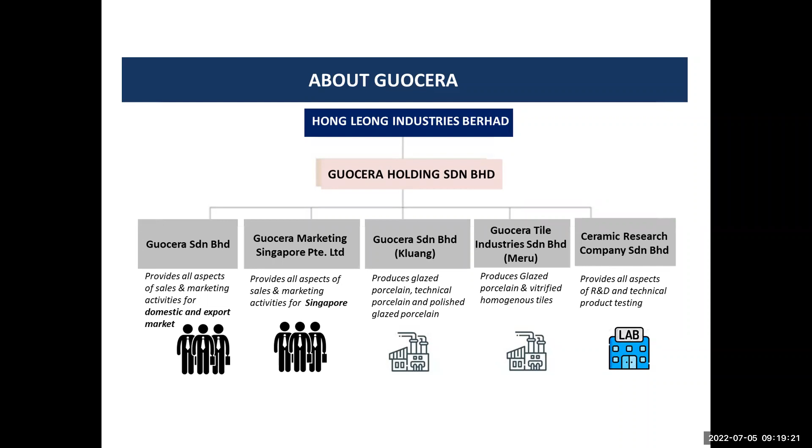We also have a ceramic research company. It's quite unique to our brand, where we do a lot of R&D and technical product testing. Okay, just to share on our two facilities, we have a combined production of 12 million square meters per year, and the factory sizes are 20 acres and 84 acres. All right, we have around 50 years of manufacturing experience in the tile industry, and we also have an export division that the same tiles that we lay here in Malaysia are being exported to overseas, around 60 over countries.

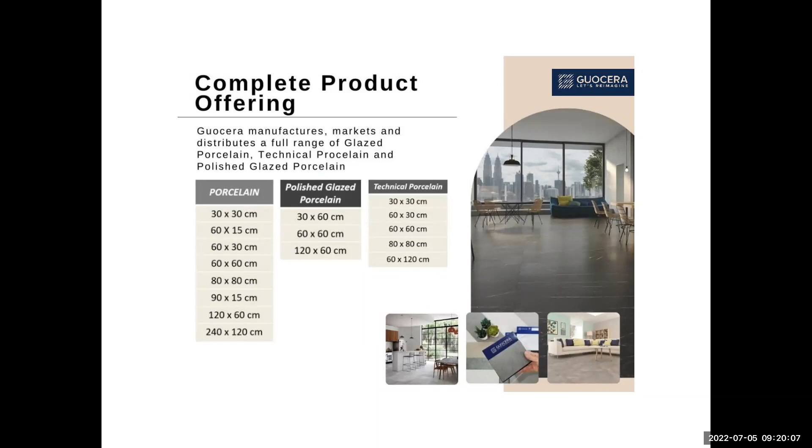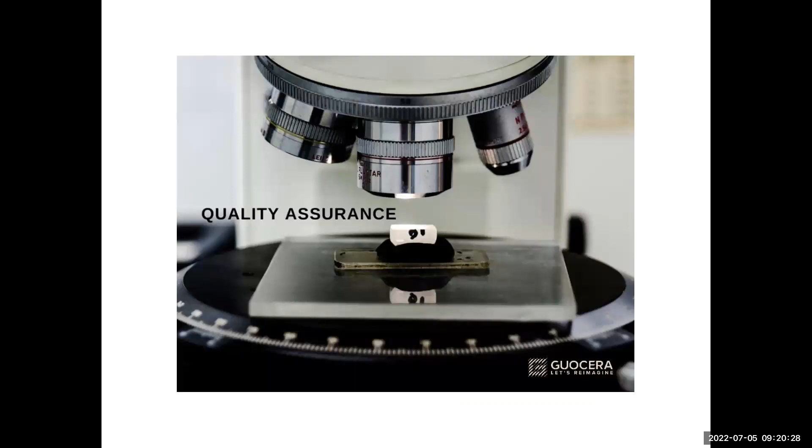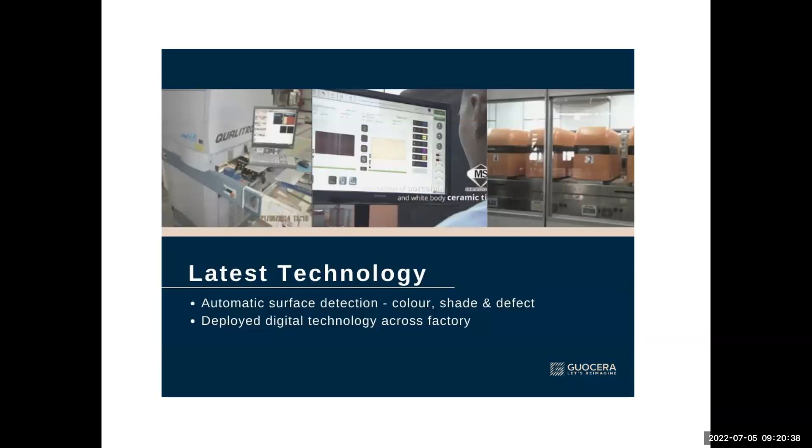Okay, we also have the standard offerings of tile sizes and tile types here, porcelain tile, technical porcelain, and we're also moving towards creating larger formats like 240 and 120 cm sizes and above. All right, we are also working on a lot of NPD product development, working together with European brands, ID brands, to come up with the latest designs in the market. Okay, and of course we have the quality assurance, we have the certifications to comply lah. Okay, and the latest technology that we use in our factories, such as the automatic surface detection, and also other new machinery that we have adapted lah.

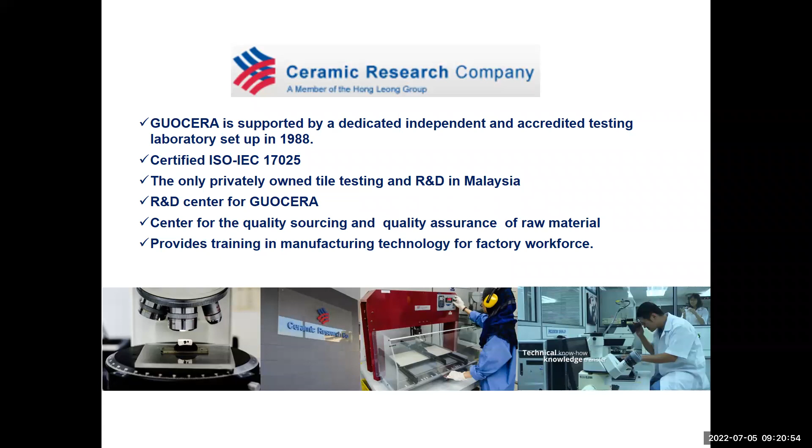Okay, so this is more about the ceramic research company in Meru, Klang. We're also open for visitation. You can get in touch with me, where we do a lot of the sourcing, the quality assurance of the raw materials, and also of our tiles. All right, some of the green, the certs that we comply with, green certs and also others.

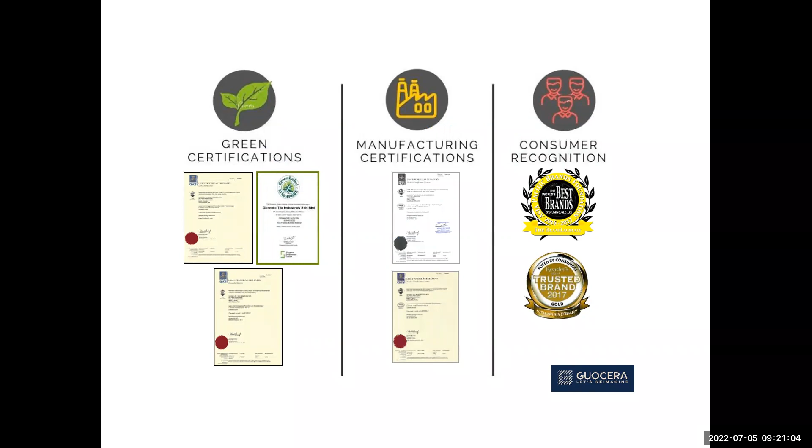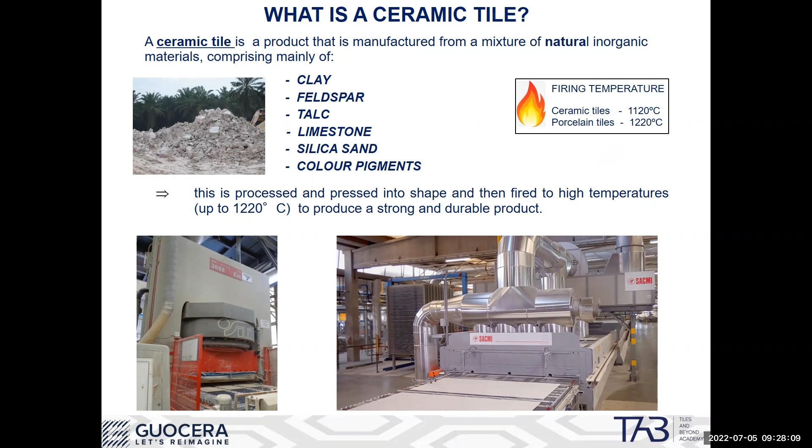You may be asking why this shade variation happens to tiles. There are two reasons. Number one, it is because of the raw materials. As I mentioned, the raw materials used to produce ceramic tiles come from the ground, and these raw materials tend to vary from batch to batch, causing the tiles to have variation from batch to batch as well.

Secondly, it's because of the firing process. You may be asking why the firing process can actually affect the shade variation. It's because the shade or the color is very sensitive to temperature changes. The tiles are fired up to over 1,000 degrees. If there is a drop or a rise in temperature by about 5 to 10 degrees, it will also affect the color. This is the reason why all ceramic tiles will have a slight shade or color variation.

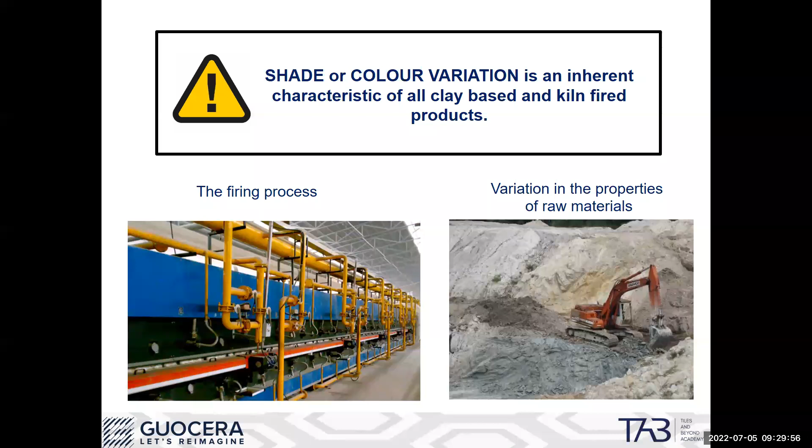Now, what are the advantages of using ceramic tiles? What are the technical features? There is a long list of advantages for ceramic tiles. Number one, traditionally, tiles are basically considered just a surface covering. For example, you want your cement floor to look nicer, so you get some tiles to cover it and make the floor look nicer. So basically, it is a surface covering.

But nowadays, if you were to walk into a sales gallery of a tile shop, you will see a lot of tiles which simulate the looks of natural stones and marble. You can also get tiles which look like wood designs. So now tiles are available in so many types of designs, many colors, and many types of texture. It can be glossy, it can be rough. If you want to use a tile for a wet area, you choose a tile with a rougher surface. So there's a big range of tiles available in the market.

Now tiles are no longer considered just a surface covering. It is a product which is able to transform any space.

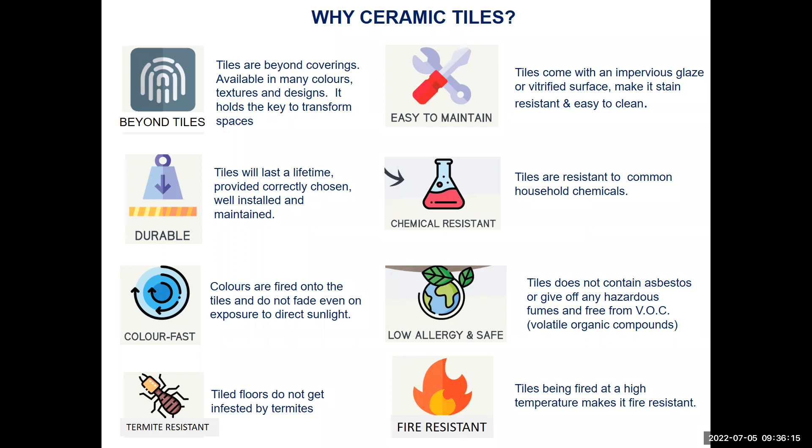And last but not least, since tiles undergo a firing process, the tiles are also resistant to fire. So these are the advantages of ceramic tiles.

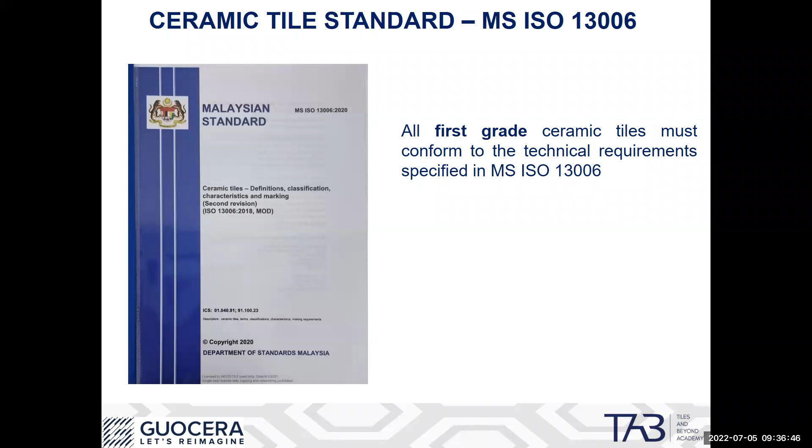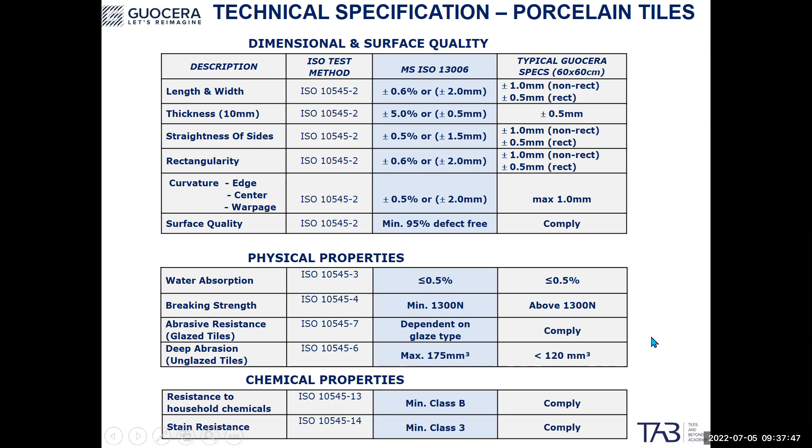Now, let's talk about the different types of tiles. I know some of you will be very confused. When you walk into a tile showroom or tile shop, you will see there are so many types of tiles, so many ranges. How do you actually know when you look at a piece of tile whether it is a porcelain tile, or whether it is a homogeneous tile?

I know you have heard of this tile called homogeneous tile. Later we shall explain what a homogeneous tile is. So how do you actually distinguish? When you look at a piece of tile, how do you immediately recognize that this piece of tile is a homogeneous tile? How do you do that?

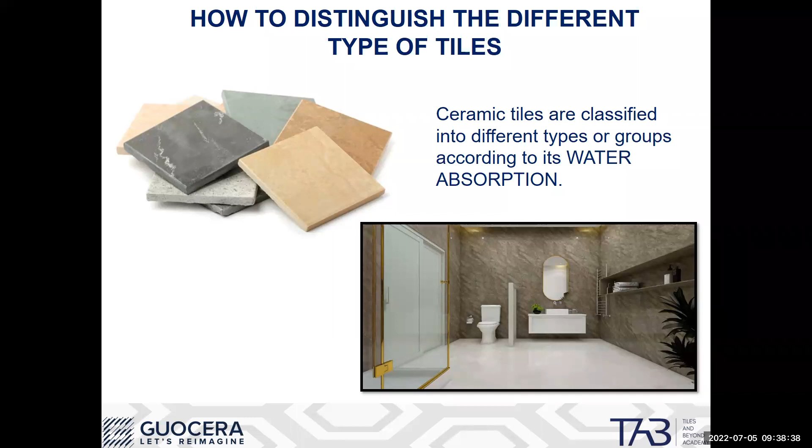So you can see there is a property called water absorption. What is water absorption, you may be asking? Basically, if you were to take any piece of tile and immerse it in water, the tile will tend to absorb a certain amount of water, and this property is called water absorption. Some tiles are more porous, meaning they will absorb more water or moisture. Some tiles have very low porosity, meaning very low water absorption, and they will absorb very little water.

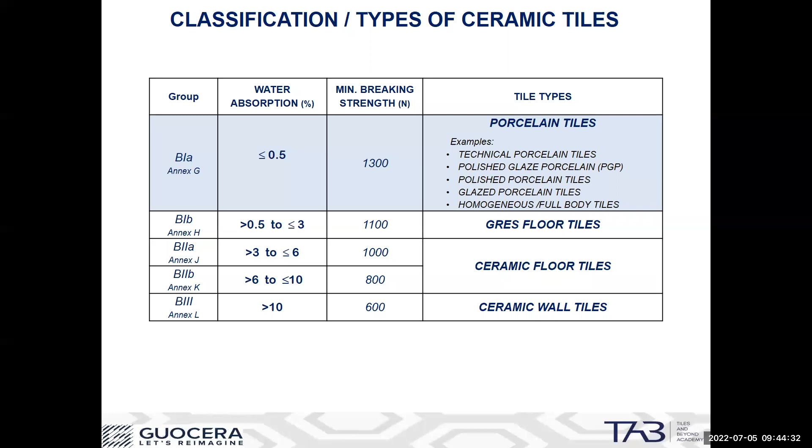So there are 5 different groups or types of tiles available in the market. Now, next, let's look at some examples. I know there's a lot of questions being asked, what is a homogeneous tile? Another name for homogeneous tile is full body tiles. Now, when I say full body tiles, I think you probably have an idea what a full body tile means.

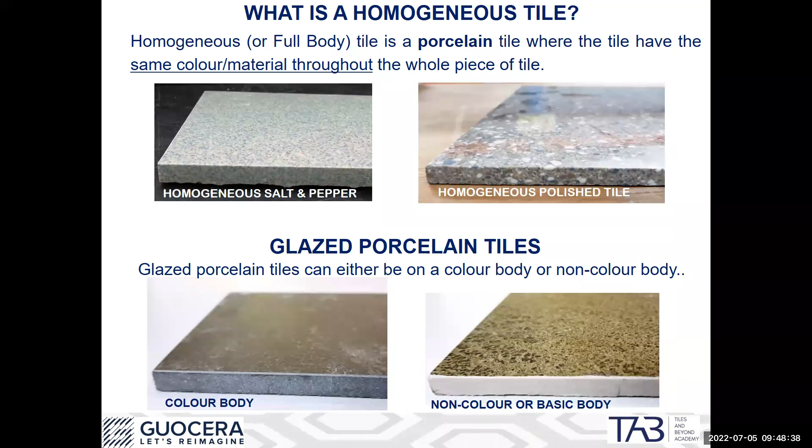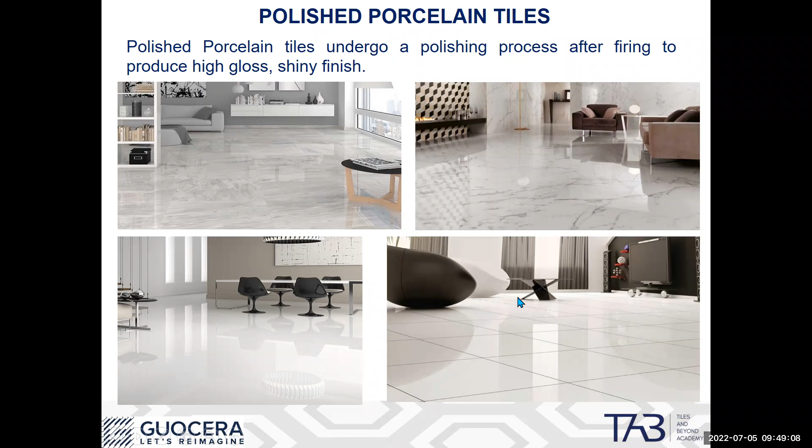Then there is this polished porcelain tile. I'm sure you have also seen this product before. Polished porcelain tile basically undergoes a polishing process. After the tiles have been fired in the factory, the manufacturer will send these tiles to a polishing process, whereby the surface of the tiles is polished, in order to get the high gloss and a very reflective surface. So this is polished porcelain tile.

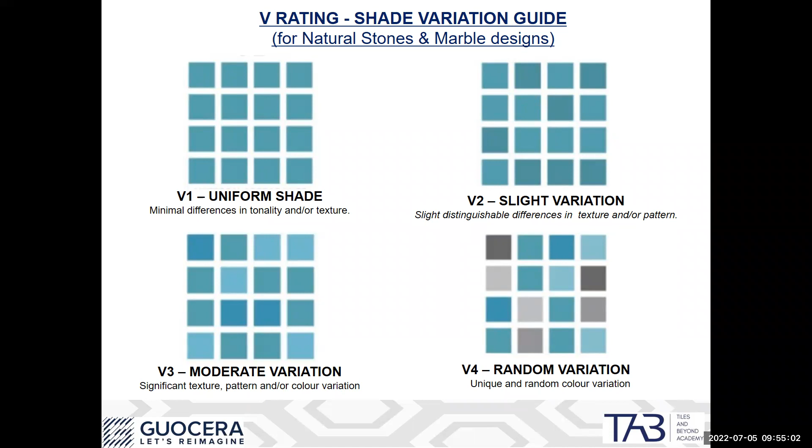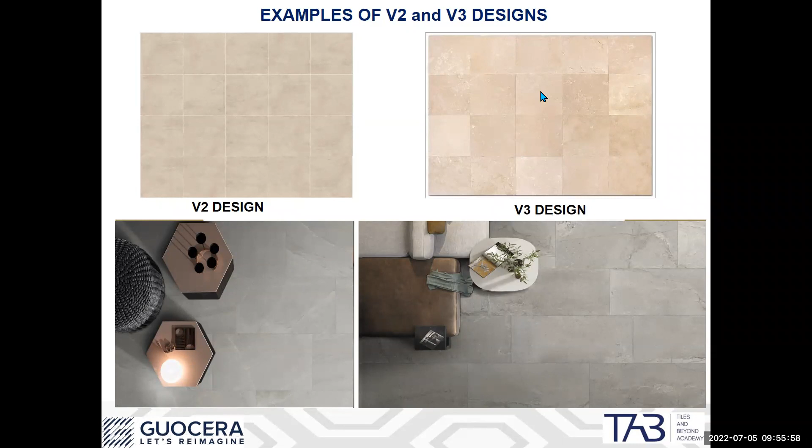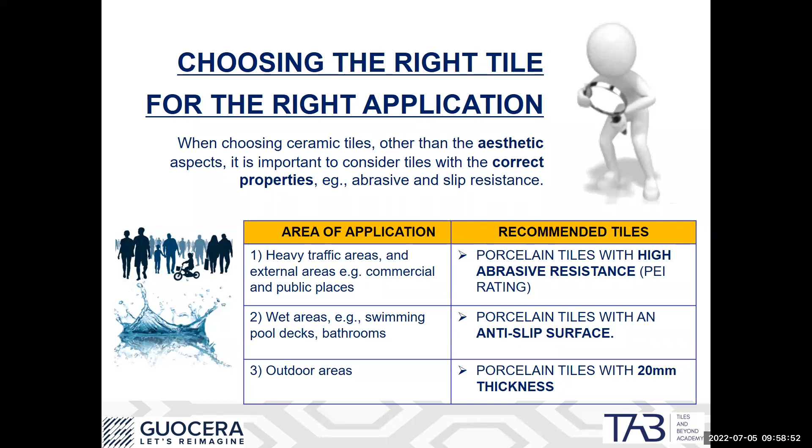Now, as I mentioned, if you are selecting tiles to be installed in a high traffic area, you need the surface of the tiles to be able to resist scratches and also resist abrasion, meaning the surface of the tiles does not get worn off too easily. Now, the PEI rating is used to indicate the abrasive resistance of the glaze surface. All glazed tiles will have a PEI rating. Now, for tiles which are very glossy, for example a ceramic wall tile...

That ceramic wall tile surface is normally very glossy. A tile with a glossy surface normally has a very low PEI class, and low PEI class means it's very easy to get scratches, and the glaze is easily abraded off, meaning it easily wears off. For tiles with a rougher surface, when you feel the surface and it's actually quite rough, that normally will have a higher PEI class.

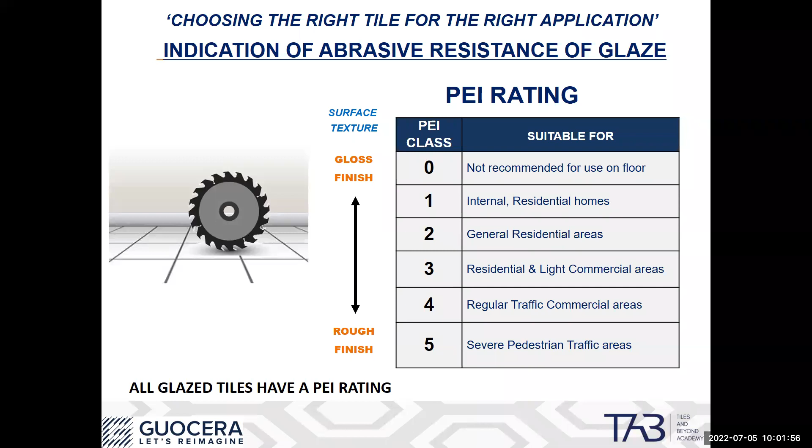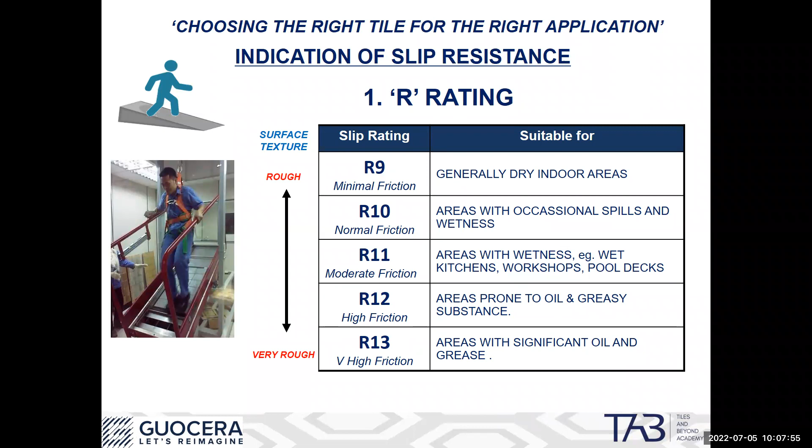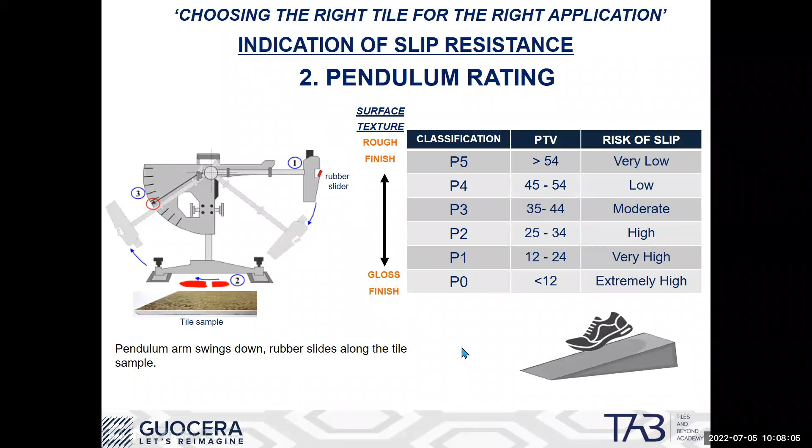Then there's a second test, which is the pendulum rating, which uses this machine that looks like a pendulum. And the other one is the coefficient of friction rating. So there are 3 different tests, 3 different ratings as well. The 3 tests are not correlated.

Now in Malaysia, it is very common for end users to look at the R rating and also the pendulum rating. So the coefficient of friction rating is actually not so popular in Malaysia. For customers, like in America, they prefer to look at the coefficient of friction rating. So different countries favor different sorts of slip resistance testing.

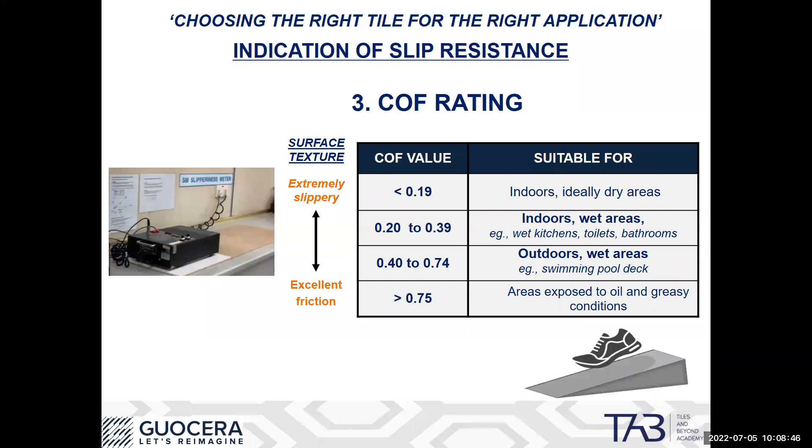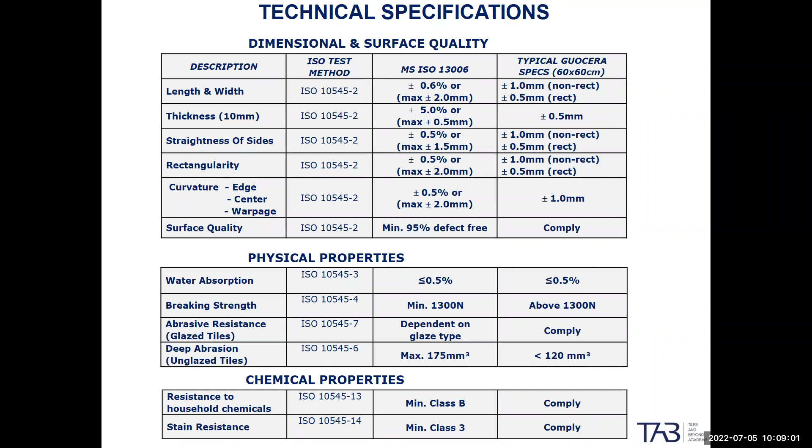Now I am going to go through the technical requirements, so that when you're looking at a technical specification, you understand what it means. Okay, so now let's look at the length and width.

Now, the length and width in the MS ISO 13006 mentions that there is a tolerance for the length and width for the tiles, and the standard is plus minus 0.6% of the length and width, or a maximum of 2 millimeters.

Which means, for example - just to give you an example to see how this standard works - let's say we look at a 60 by 60 cm tile. So 0.6% of 600 is actually plus minus 3.6.

And 3.6 millimeters exceeds the maximum of 2 millimeters. So for a large format tile, a 60 by 60 cm tile, the maximum tolerance for the length and width is plus minus 2 millimeters.

All right, now for Guocera - Guocera actually has an internal standard which is not more than 1 millimeter. Guocera has got two

types of tiles - one which is called rectified, and one which is called non-rectified, which I will explain in the next slide. So for rectified tiles, the size tolerance is more uniform at plus minus 0.5 millimeter, and for non-rectified tiles, it goes up to a maximum of plus minus 1 millimeter. So it is still more stringent than the ISO standard.

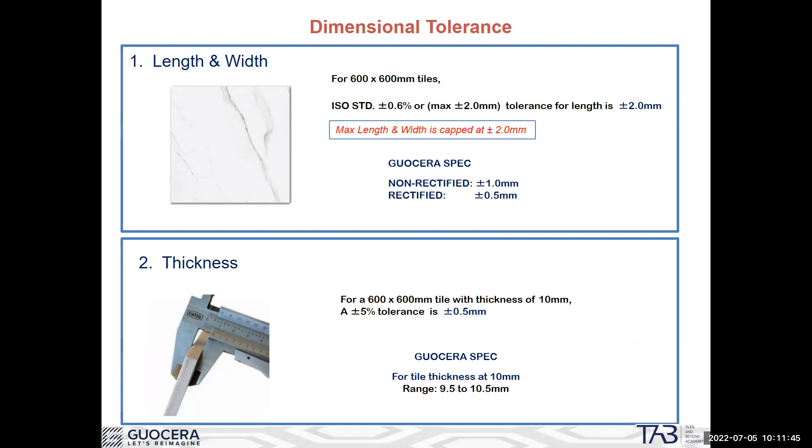Now, I mentioned just now rectified and non-rectified tiles. There are basically two types of tiles. One is supplied with a more uniform size tolerance of plus minus 0.5 millimeter, whereby manufacturers send the tiles for an additional cutting process, where the four edges of the tiles are cut or trimmed to get a more uniform size tolerance of a maximum of plus minus 0.5. However, for tiles which are non-rectified, the size tolerance is much bigger, at plus minus 1 millimeter.

For certain projects which go for the QLASIC assessment, the assessment sometimes requires the tile joints to be consistent. In order for the tile joints to be consistent, the recommended tiles would be to select tiles with a more uniform size tolerance. So for job sites requiring the tile joints to be consistent, the recommended tile to choose would be rectified tiles.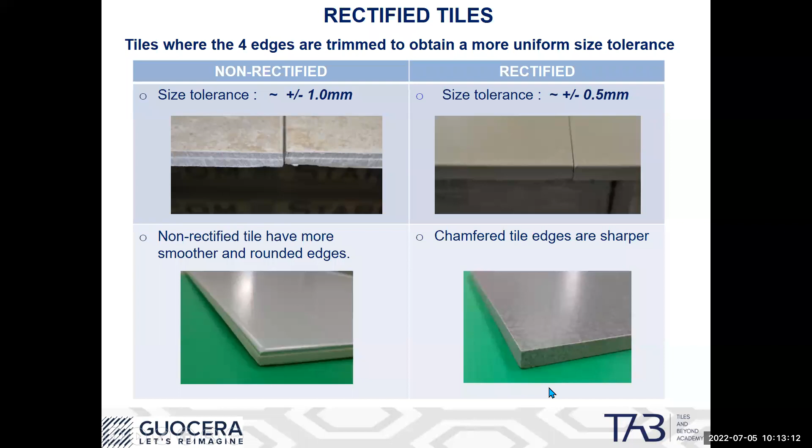Now, next, there is also a tolerance for the curvature. For your information, tiles manufactured under the standards have an allowable tolerance on the curvature. It doesn't mean that first grade tiles must be 100% flat, so there is a tolerance. I will explain why some batches of tiles are actually quite flat, while some tiles have a slight curvature.

Let me explain the standard first. For the tile curvature in the standard, there are three measurements on the curvature. One is called the center curvature. The measurement is done on the tile surface to see how flat the tile is.

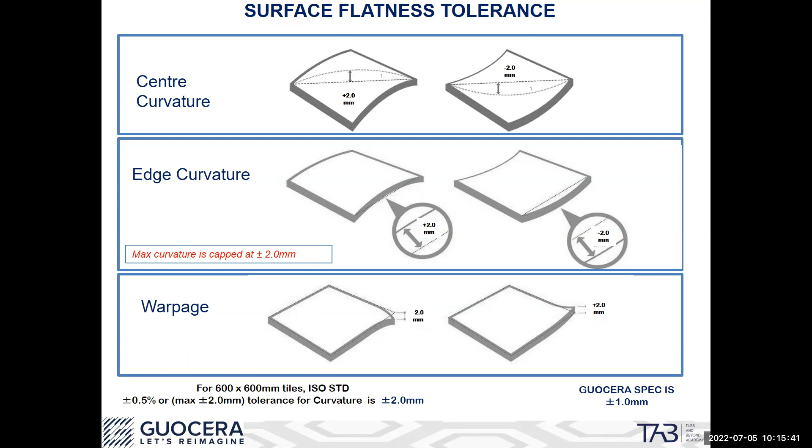Now let me explain why. I think there are a lot of questions asked: why can't tiles be produced 100% flat? In order to explain this, let's look at the manufacturing process.

So from the entrance to the exit, these tiles will move on rollers before going to the firing process, and also before exiting the kiln. So one cycle would be roughly about 48 to 55 minutes.

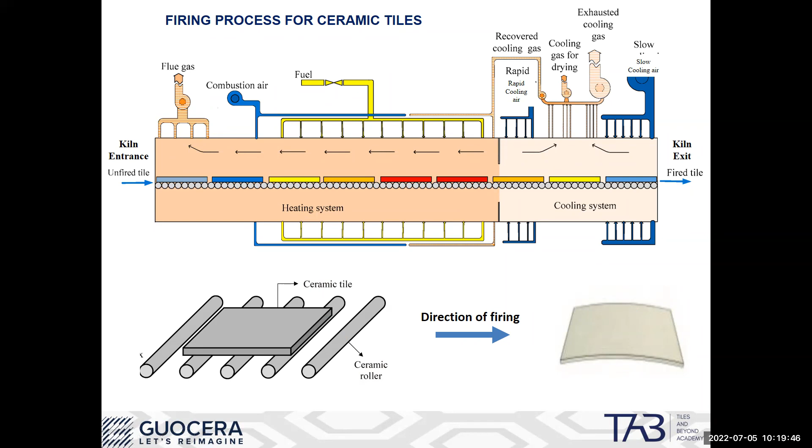Now I will just quickly talk about the chemical resistance test. You'll notice that if you look at the technical specs, it says the minimum requirement is class B. Class B means first of all you need to understand how the test is done. For chemical resistance, there are two chemicals used for the test: household chemicals and also swimming pool salts. Swimming pool salts are basically chlorine, which are used in swimming pools. These two chemicals are actually placed on the surface of the tiles and left for 24 hours, and after 24 hours, we want to see the effect of these chemicals on the surface of the tiles.

If there's no visible effect, then the chemical resistance test for this particular tile is called class A, and most, I would say majority, of the tiles are actually class A. The minimum requirement is class B, which is if there is a slight visible change on the surface of the tiles, it is still acceptable, but this is the minimum requirement. Class C means after the test, the surface of the tile is partially or completely affected. We cannot have a tile that gives a class C result in the chemical resistance test - it will fail and will not be sold as a first grade tile. Minimum requirement for chemical resistance is class B, and I would say majority of the tiles supplied as first grade are class A.

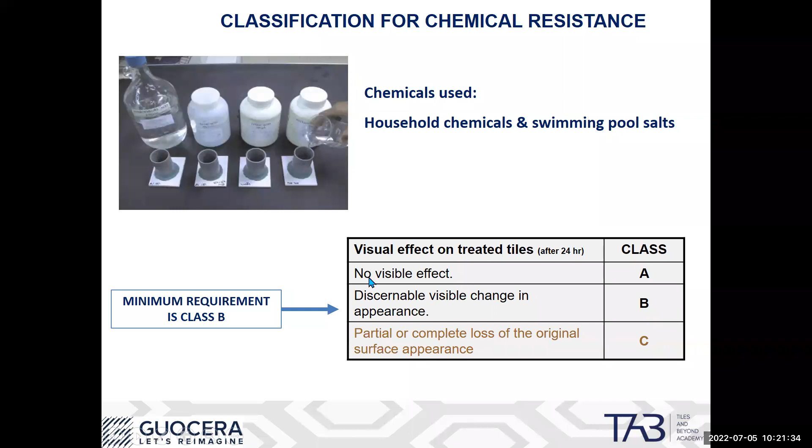Then next is the staining resistance test. Basically, end users do not want the tiles to stain, so the staining test is one of the requirements. For the staining test, 3 staining agents are used: chrome green solution, iodine solution, and also olive oil. These 3 agents are very strong staining agents. I'm sure you have come across iodine, used for small wounds - sometimes you can buy it from the pharmacy.

This is the yellow solution. It actually stays on your finger for a long time. That's why these are strong staining agents.

These are basically used for the test, and the stains are put on the surface of the tiles and left for 24 hours. After 24 hours, the test requires checking how the stain can be removed.

If the stains can be removed by running hot water, then the stain resistance class for this tile is class 5. Most tiles which are glossy, especially ceramic wall tiles which are very glossy, the stain can be easily removed even by running hot water.

And then, if the stain can only be removed by hand cleaning with a weak cleaning agent, then it is class 4.

And then if the stain has to be mechanically cleaned, meaning you have to use a sponge to clean the surface mechanically using a stronger cleaning agent, then it's class 3. Class 2 and class 1 actually fail the test.

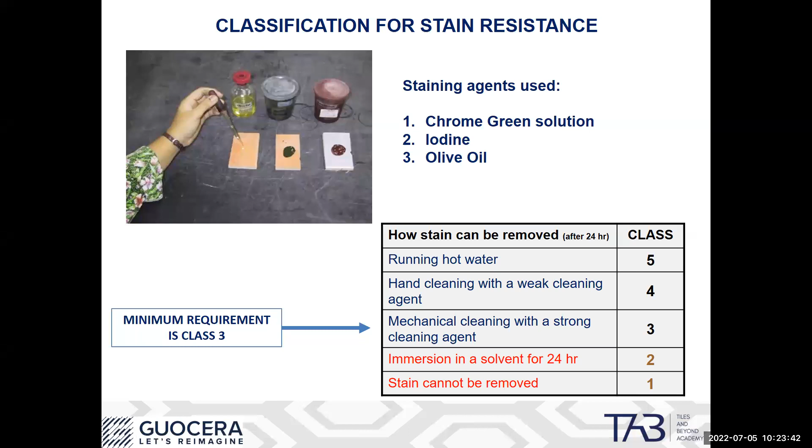Okay, I have come to the end of part 1. This part 1 is basically on the type of tiles and also on tile specifications. So now let's go for a Q&A session if you have any questions on part 1, before we go for a 15 minute break.

Hello, there are some questions in the chat box, by Mr. Chong. Any possibility to consider tiles with fire-rated material? I can't hear, your voice is very soft. Wait, Mr. Loo. I still can't hear, can you hear? Oh yes, better now. Okay, any possibility for tiles to be fire-rated material?

I think you've answered that question, right? It's fire. Oh, there are some questions, is it? Oh, I didn't see it. All right, let me see. I couldn't hear you properly, Kasuri. Let me go to the... sure, okay let me see. All right, let me go to the comments. Okay, all right.

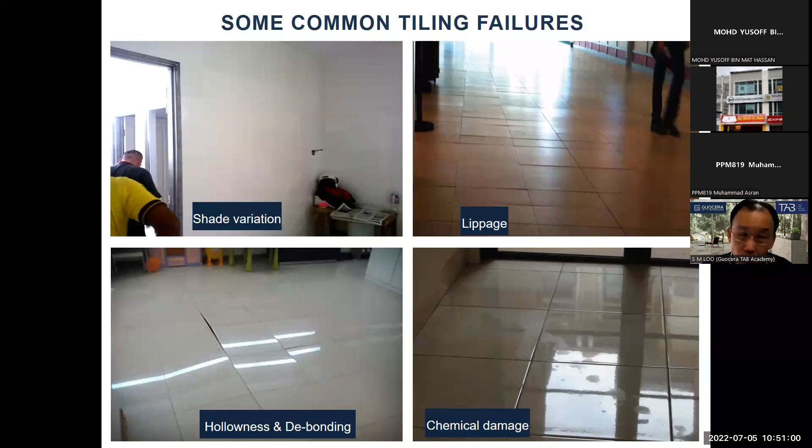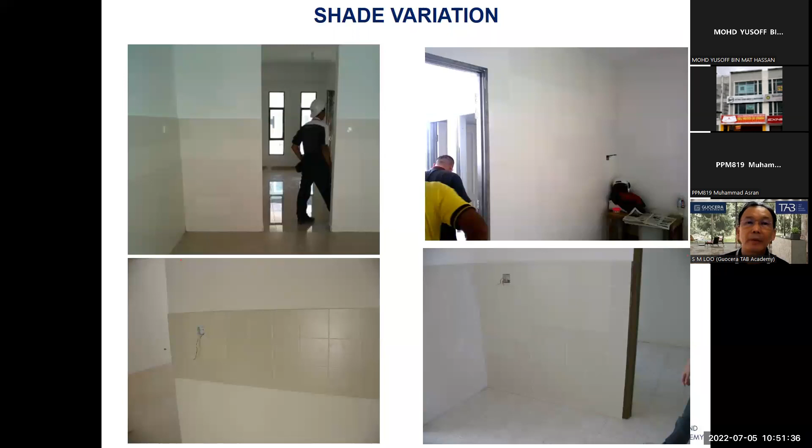Now let's talk about the causes of shade variation. Basically, there are two causes of this problem. I did mention earlier that shade variation is an inherent property of ceramic tiles.

Tiles when supplied in the box always have an indication of a shade number or shade code, which is for the tiling contractor or end user to make sure they do not mix different batches of tiles and install them together. Most of the time when we face this sort of shading variation problem, it is basically caused by mixing one or more different batches of tiles.

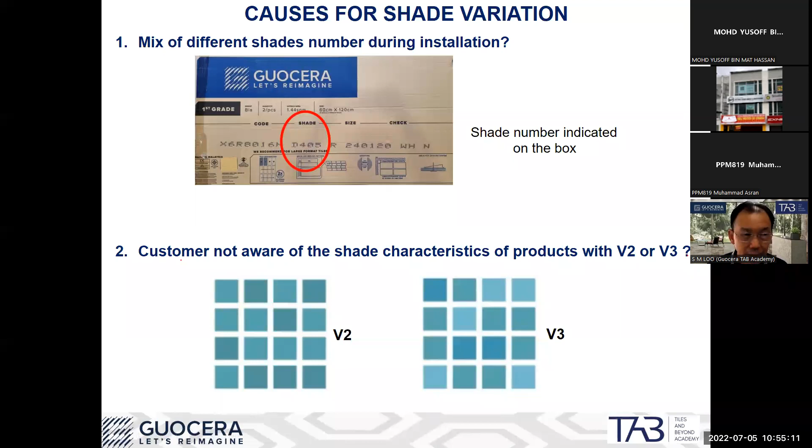So knowing the product before the tiles are chosen is very important. Once you know the particular things you need to know before choosing the tile, then this sort of thing will not happen.

Now next we look at hollowness. I think this is a common problem nowadays - especially when house owners get the keys to their new house, the first thing they do is take a tapping rod, like this one, and tap on every piece of tile in their unit.

Now, what is the reason for tile hollowness? It is basically caused by insufficient application of adhesive, resulting in air pockets or voids beneath the tiles. So when the tiles are tapped, of course they sound hollow.

So now the question is always, will hollowness lead to tile failure? The answer is it depends - it depends on how severe the tile hollowness is.

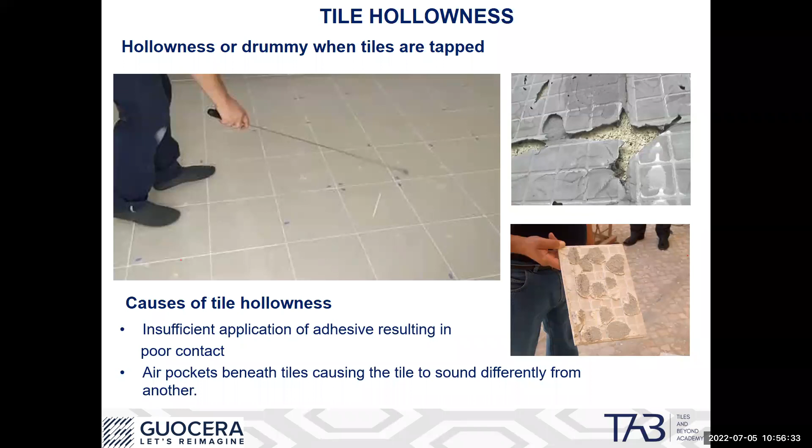For example, if you tap a piece of tile and only the four corners are hollow but the rest is intact, then the tile will not fail. But if you tap and about half or 50% of the tile is already hollow, that is not a good sign - it's a sign the tile will fail eventually.

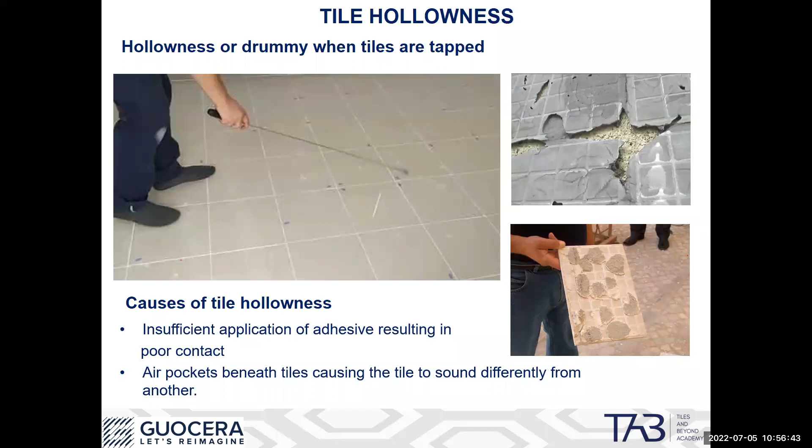Okay. Now I want to show you this short video just on the hollowness.

Okay, so basically these tiles, the first piece was good, very good, there was no hollowness. And the second part, the tiles are hollow. Which means this second piece of tile is going to fail anytime. This is actually called tile hollowness.

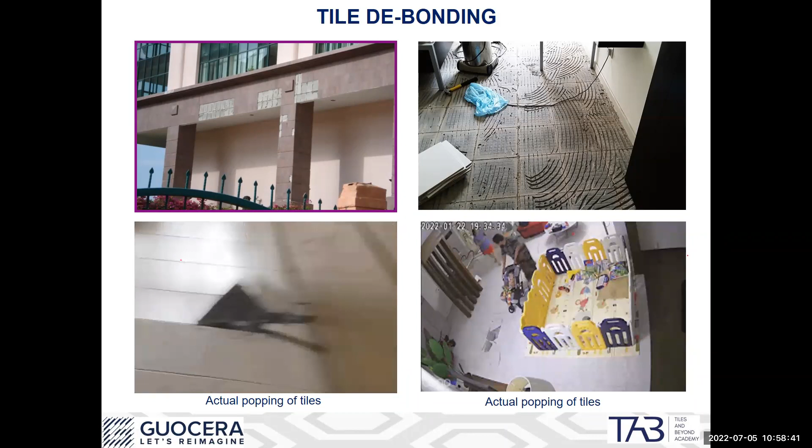Now, let me explain why. If you remember, when I started I spoke about the water absorption of porcelain tiles. What did I say? The water absorption for porcelain tile is very close to 0, less than 0.5%, and most porcelain tiles now produced in the market are very close to 0%. Which means a piece of porcelain tile is like a piece of glass. A glass, if you do the water absorption, it is also very close to 0.

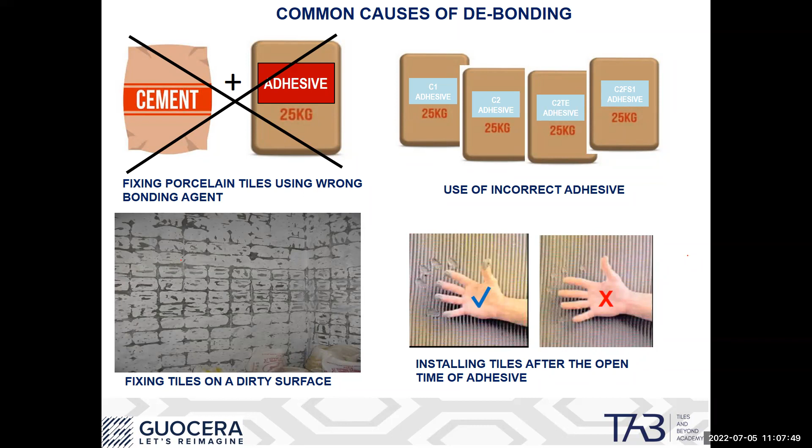And here - installing tiles after the open time of adhesive. Sometimes when the contractor is using adhesive to do the installation, let's say he has applied the adhesive, and then suddenly he notices it's already lunchtime. So he goes for lunch, and comes back about an hour later to complete the installation. Now that one hour will have already exceeded the open time. So this is also one of the causes of tiling failure - installing tiles after the open time of the adhesive.

Now next, fixing tiles too early after screeding. Of course before the tiles are installed, you need to prepare a screed layer, as per MS1294.

MS1294 is the tiling standard or code of practice for tile installation. It recommends that the screed layer needs to be allowed to cure, to dry for at least 14 days, which means 2 weeks, before tiling commences.

Why does MS1294 mention this? During the first 2 weeks, the screed layer is undergoing evaporation. When water evaporates from the screed layer, it undergoes a process called hydraulic shrinkage, and this is when the screed layer actually has very high shrinkage.

So imagine if tiles are installed immediately after the screed is prepared, within the first 14 days. When the screed undergoes hydraulic shrinkage, it gets smaller and smaller, and this will affect the tiling system. In Malaysia, most tile installations are done probably 1 or 2 days after the screed, so this is not recommended. This standard doesn't come from me, it is actually specified in MS1294.

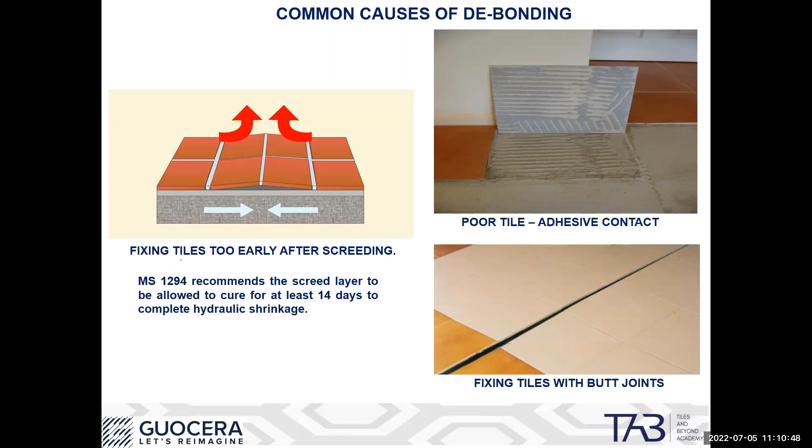MS1294 recommends that the installation gap between two pieces of tiles, whether for wall or floor, is minimum 3 millimeters. You may want to know why MS1294 recommends a 3 millimeter gap. This is not only mentioned in the Malaysian standard, it is also mentioned in other international standards for tile installation, minimum 3 millimeters.

This is because you need to install tiles with a joint to accommodate for two main factors. Number one is to accommodate for the dimensional tolerance of the tiles. Tiles are supplied with a certain size tolerance, even rectified tiles that go through a trimming process still have a tolerance. Number two is to accommodate for the substrate contraction and expansion, and also differential movements.

Remember, substrate contraction and expansion. Normally when there is a failure, the end user, contractor, developer or architect will put the blame on the tiles. They say the debonding is caused by the high expansion of the tiles. I think you've probably come across this sort of comment. So you may want to know, is it due to the high expansion of the tiles causing the failure? Let's go to the next slide.

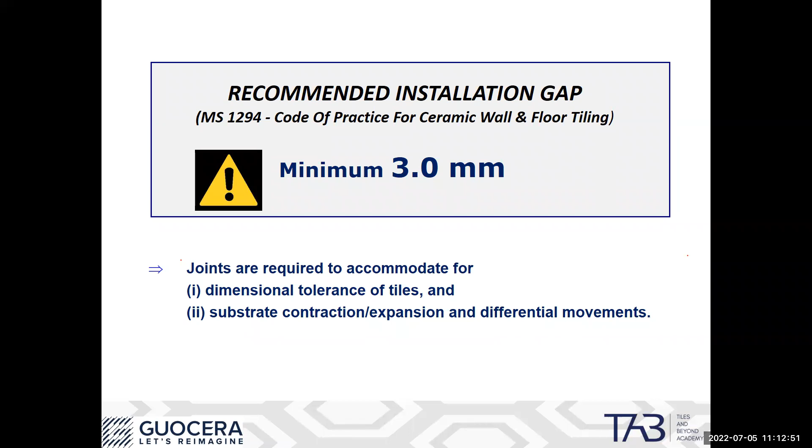Now let's look at expansion. Any material, when subjected to heat, will tend to expand, and also when any material absorbs moisture or water, it will tend to expand as well. Let's compare tiles and cement concrete on thermal expansion. You notice the concrete and cement mortar actually expand almost double that of the tiles. So there is double the thermal expansion in concrete cement mortar compared to the tiles.

And you notice moisture expansion, when any material absorbs moisture, it will also expand. Porcelain tile normally will have no moisture expansion, because porcelain tile has very low water absorption.

For ceramic tile, since it's porous, it has a small moisture expansion of 0.2 millimeters per meter. Cement mortar's moisture expansion is almost 3 times that of ceramic tiles, and this is the reason why tiles, when installed, must have a minimum 3 millimeter gap.

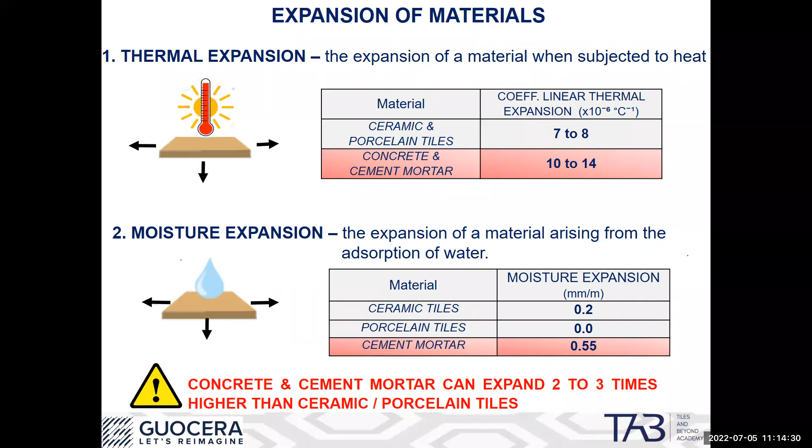Okay, let's go to the next slide - this is the guide. Of course tile joints are recommended, but also if the area where tiles are installed is very big, remember tiles are now getting bigger and bigger. The trend is going toward large format tiles. In the olden days, I mentioned in 1980 the biggest tile size was only 30 by 30 cm. Now tiles can go up to about 1 meter.

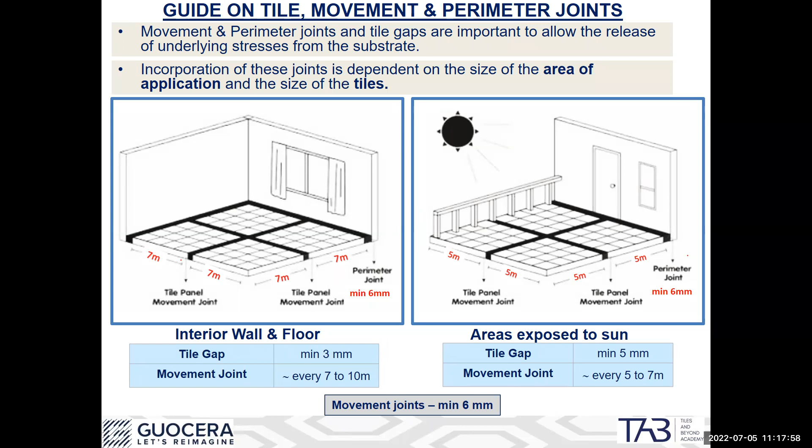Now, how do we actually achieve optimal coverage? This is very important because we do not want any hollowness in the installed tiles. So how do we do that? In order to do that, you need to use a notch trowel, which gives the notch when you spread the adhesive.

This is also a recommended installation method, especially for large format tiles - to apply a thin coat of adhesive to the tile back. If you cover the whole tile back with a thin coat of adhesive, you basically maximize the coverage of the adhesive to the tile back.

The application and spreading of the adhesive is also very important. It is recommended to spread the adhesive in a straight line, compared to spreading in multiple directions. We normally see this at job sites, where contractors apply the adhesive in multiple directions. This is not so recommended because it will be more difficult to remove the trapped air when the tiles are tapped in, or the adhesive ridges are not able to be flattened. There will also be some trapped air if the adhesive is applied in multiple directions.

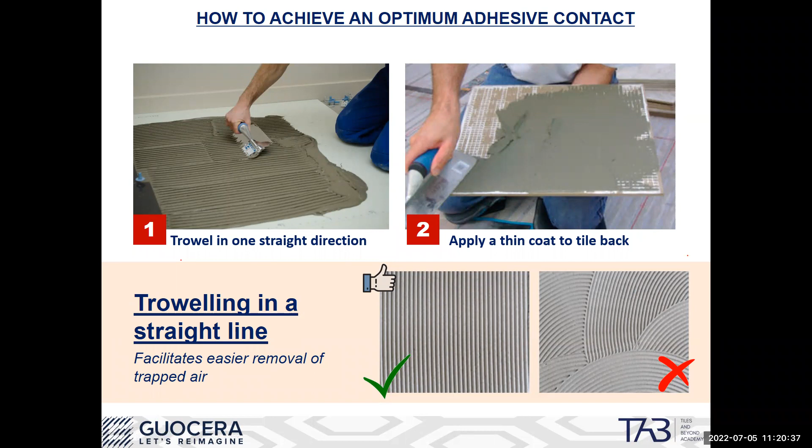Now you can see this in these photos here. You notice that if there is no hollowness, if the application of the adhesive or the installation of the tile is very compact, it will also improve the impact resistance of the tiles. If there's any hollowness, when the tiles are installed with hollowness, anything you drop will tend to break the tiles more easily, compared to if the tiles are solidly embedded.

So you notice here, if the adhesive is properly applied, then the impact resistance of the tiles will be much more stronger.

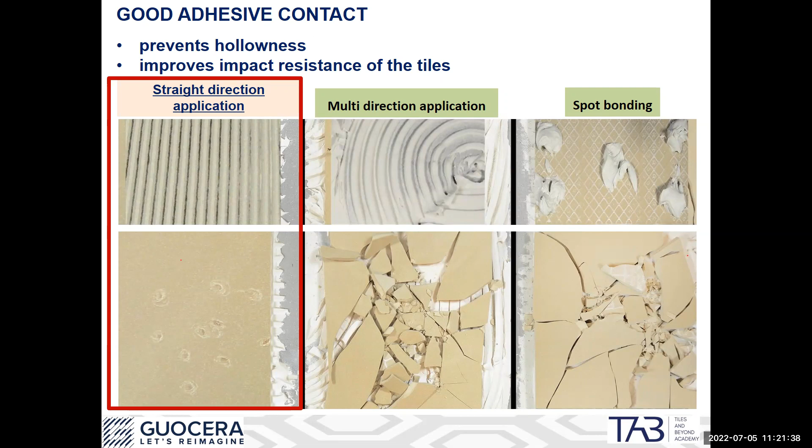Now this is the standard for the minimum tile adhesive coverage. It is mentioned in the MS 1294. It says that the minimum has to be 90% coverage between the tile and the adhesive. This is actually specified. There have been a lot of questions asked to see whether there is any standard - there is, minimum 90%.

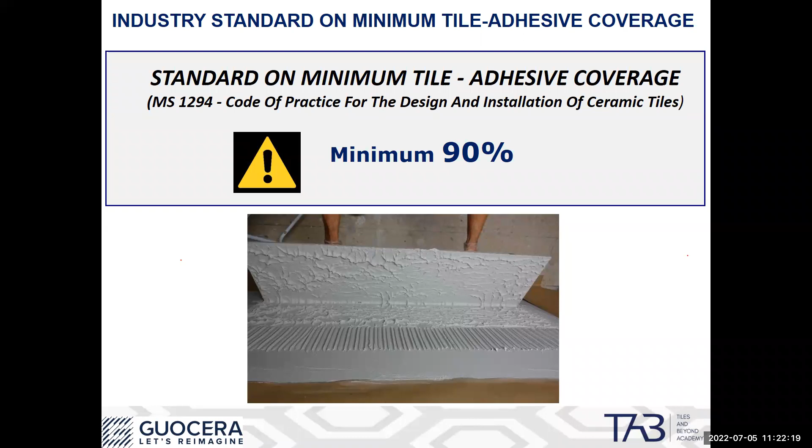Now this slide is to address some of the questions. Contractors asked which type of tiles need to be soaked in water before installation. Of course, there are a lot of ceramic tiles - meaning tiles with high porosity - being installed using cement.

So if cement is used for the tile installation, then tiles with a water absorption of 6% or more need to be soaked. I repeat: if the installation is done using cement mortar, porous tiles with water absorption of 6% or more need to be soaked in water before tile installation.

Now the reason is obvious. Because a tile with very high water absorption, if you don't soak the tiles and you apply the cement mortar, the tiles will immediately absorb the moisture from the cement mortar, and without the moisture, the tile is not going to bond very well.

Now there is also a question from end users asking: when the tiles have already been sent to the job site, how do we know the water absorption of the tiles, in order for us to know whether to soak or not to soak the tiles?

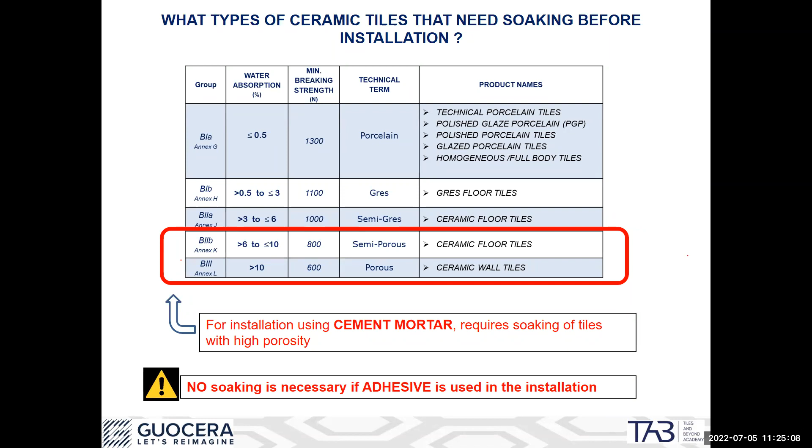Now, if you are using adhesive for the installation, there's no need to soak the tiles. For all this category of tiles, there's no need to soak. The reason is because in the adhesive, the manufacturer adds in a water retention agent, and this water retention agent is able to prevent the tiles from absorbing the moisture from the adhesive. This is the reason.

Now let's look at lippage. Lippage normally is not so common, especially when the tiles are very small. So now tiles are getting bigger and bigger, so when the tiles are installed, we tend to get lippage.

Lippage basically is a condition whereby after the tiles are installed, one edge of the tile is not at the same level with the edge of the adjacent tile. I'm sure you have seen this before.

There is a lippage standard. For CONQUAS, which is the Singapore standard, the lippage between two tiles should not exceed 0.5 millimeter. And for QLASSIC, which is the CIDB standard, the lippage between two tiles should not exceed 1 millimeter. As you can see, the CONQUAS standard is actually very, very stringent.

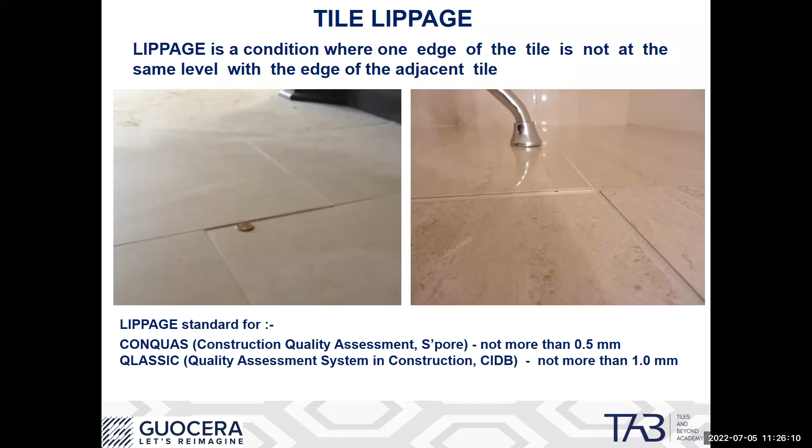So how do we actually minimize or prevent lippage? It's very simple. Since the tiles are now getting bigger, normally when they want to level the tiles, they will use the back of the hammer or the handle of the hammer to tap the tiles to level it. This will be good if the tiles are small, no problem leveling them. But if the tiles are now getting so big, imagine installing 4x8 feet tiles, manual tapping means the contractor maybe can even out 1 or 2 pieces, but after 6 or 7 pieces he will not be able to do a good job. So in order to minimize lippage, this tile leveling system is recommended to be used.

I'm sure you have seen this tile leveling system before. Now, the next point is to follow one directional orientation, you can see arrows. Contractors will know that at the back of every piece of tile there are actually arrows present. This arrow basically indicates the firing direction of the tiles when they are manufactured. So if the contractor can look at the arrow and install the tiles following the directional orientation, the lippage of the tiles can also be minimized.

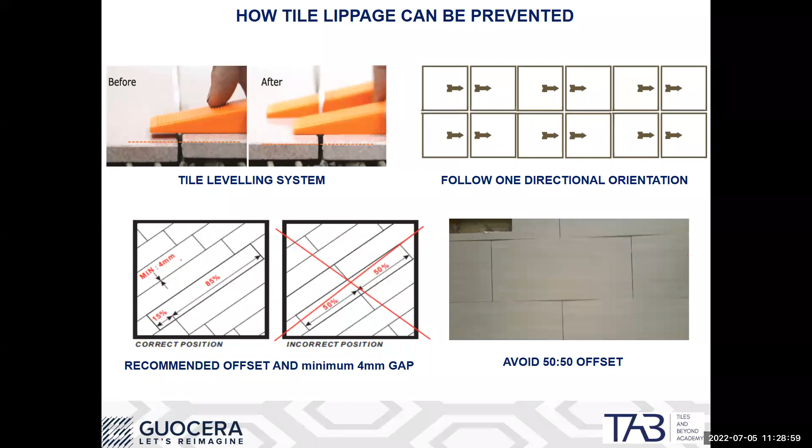I think there was a question asked about this. Basically, this is found in external areas, whereby you see white powder being deposited on the tile surface. This effect is called efflorescence. So now let's talk about the cause of this problem. It is not from the tiles. This powder is not from the tiles. The powder is basically soluble salts present in the cement and the sand.

So all cement and sand will contain soluble salts. This happens in external areas because of these soluble salts in the sand and cement. So when the substrate, meaning the area beneath the tiles, is wet, on a hot day it has to undergo evaporation. When the evaporation takes place, this powder will come out with the moisture and be deposited on the tile surface. It comes out through the tile joints.

So now the question always is, once this has happened, can it be eliminated completely? Unfortunately, the answer is no. Of course the powder can be dissolved in hot water because these are soluble salts, they can dissolve in hot water. But however, remember the substrate is still wet, and when a substrate is still wet it will still undergo evaporation. The tile joints, if porous, will let the soluble salts and moisture come off through the joints. So once this has happened, there's no way to eliminate the problem. It will be there forever.

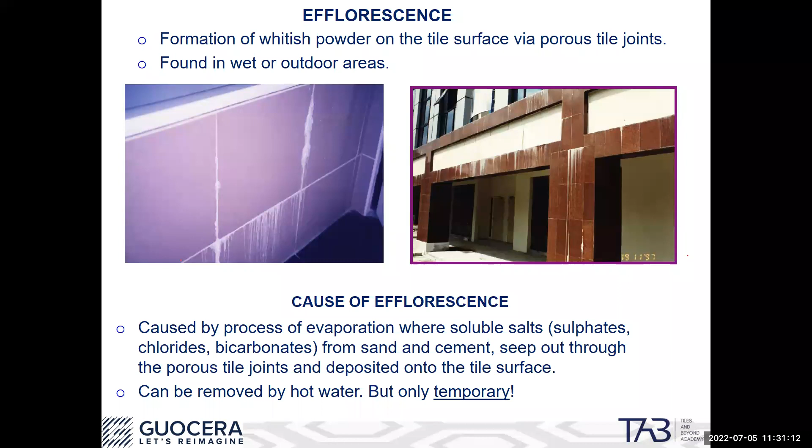Now, to control efflorescence, it has to be done during the installation stage. This is to make sure, since you know efflorescence is caused by the evaporation.

So the first thing is, before tiles are installed in an external area, the substrate needs to be dry. And after the tile has been installed, the tile joints need to be sealed with a water-resistant grout, so that rainwater or external water is not able to seep into the tile joints and wet the substrate.

You notice in this picture, contractors are installing tiles in an external area, and this is also done when contractors install tiles for a swimming pool. They will put up a tent, and this tent is specified in MS 1294, to prevent rainwater from wetting the substrate before the tiles are installed. This is part of the code of practice.

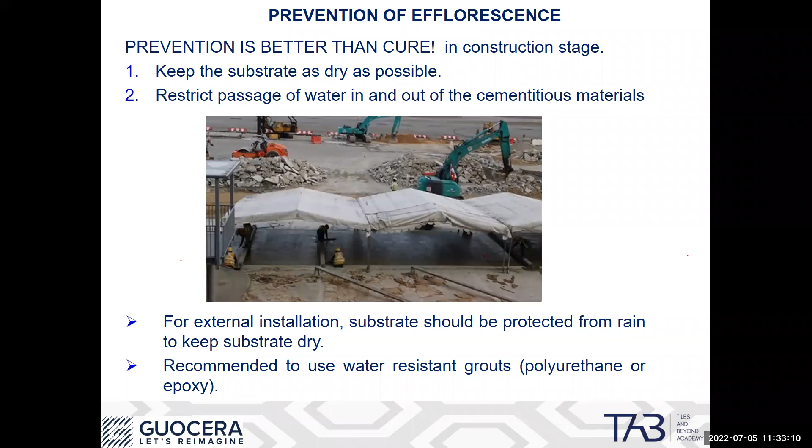So to prevent efflorescence, first of all you have to make sure the substrate is dry. Then after the tiles are installed, the tile joints have to be sealed with a water-resistant grout. What are the water-resistant grouts available in the market? Epoxy is one. Some of you will say epoxy is very expensive, but there's an alternative - if you don't want to use epoxy, you can use a material called polyurethane, which is also water resistant. This will prevent efflorescence from happening.

Once the surface of the tile is already damaged, there's nothing you can do - the only thing to do would be to replace the tiles. Of course, if the tile is a polished tile, then perhaps you can repolish it. For glazed tile, it is not possible to repolish because the glaze layer is quite thin, so you cannot repolish a glazed tile.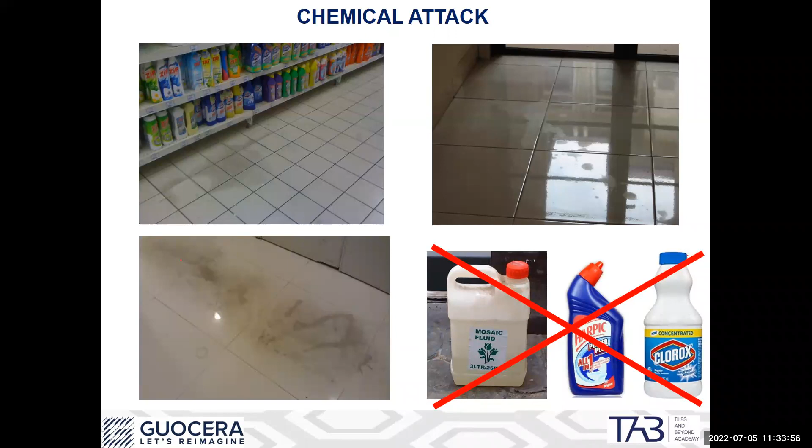Now, by all means, this sort of cleaners should be avoided. I would also say to avoid any cleaners which do not have proper labeling, because you do not know what you are actually using.

This picture on the far left is basically corrosive acid, which contractors will buy from the hardware shop. They use this to clean off cement residue and grout residue after tile installation. Of course, this has to be diluted. Just imagine if a new worker who is not experienced were to use this straight from the container and pour it straight onto the tiles - it will definitely damage the tile surface.

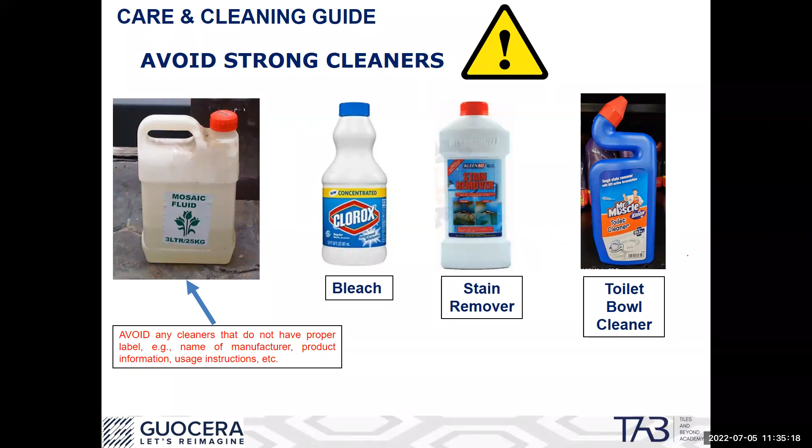Now, here I've provided a cleaning guide. There are different stains which come in contact with the tile surface, and different stains require different cleaning methods. However, there are, I would say, two types of stains - one which is considered very tough, and one which is considered not so tough.

So the tough stains would be, for example, cement and grout residue stain - I would consider them very tough. Rust stains too, especially when you have a flower pot on a metal frame that's been in your car porch for several years - once you move the flower pot, you'll see the rust mark on the tiles, and it can be very difficult to clean because rust is considered a very tough stain. So for tough stains, you need to use an acid cleaner. Now again, acid cleaner is actually quite dangerous if you do not use the correct concentration.

Acid cleaner, because it's so strong, can remove the stains, but it can also damage the surface of the tiles. Okay, we do not want that. We want to remove just the stain, but not the surface of the tiles.

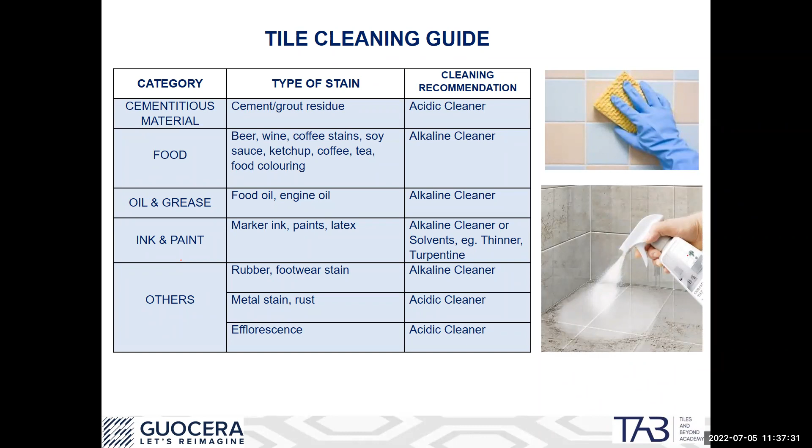Why this is good and why we recommend this is basically because, number one, it is safe on the tile surface. It doesn't damage the tile surface. It is actually produced using the right concentration. It's able to clean the different types of stains, but it will not damage the tile surface. And that's the reason why we recommend this to be used to clean any stains from the surface of the tiles. Number two, this product is a green product.

It is low in VOCs, which is actually safe for the environment. So now, if you are interested in this product, you can contact our sales department. Very good cleaners. I've actually tested this, able to clean all the tough stains, but it actually doesn't damage the surface of the tiles.